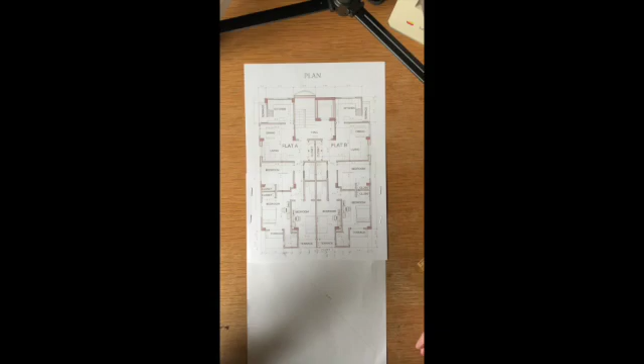But I have dimensions that are being put on there all over the place. So what I'm going to do is try and make a scale that will fit this particular drawing. I don't know what the scale is, so it'll be a bespoke scale. So I've taken a dimension which has been put on for me here, which is 25 foot 11 inches from there to there.

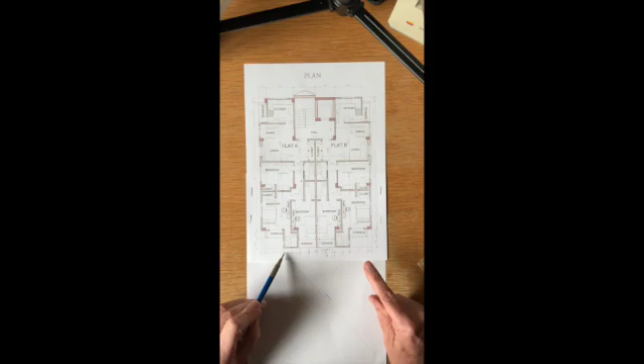So what I've got to do is to try and figure a way of doing this. Now, fortunately, there is a way that I can do this. So what I need to do is to draw a line from the beginning of the dimension down. Now, there is no angle that's required there. It just happens to be a line from there out that I can start to put a proper scale on. So I've marked off the beginning and the end of the dimension, and I've drawn my line down there.

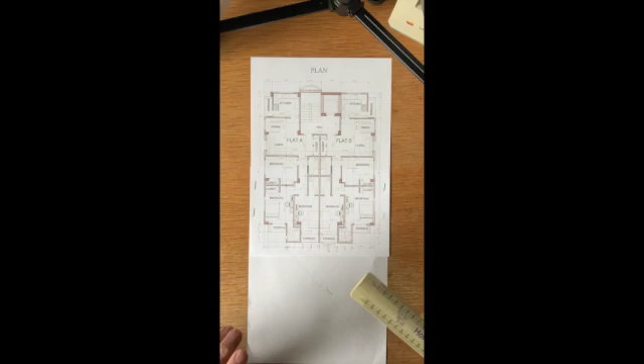So what I need to do then is to get my scale bar, which is this one here, and I'm choosing 1 to 100, and I've converted that 25 foot 11 inches to metric, because I want to draw in metric. So I've converted that across to 7 meters 899. So what I need to do is to mark off in true scale along that new line 7 meters 899. So I've done that and I've put it across there.

So I've also marked off all the meter bars all the way along that. So each of these little dimensions here, that one there, there, there, and there, are the meters. And that is the remainder of the 899, which is just slightly shorter than the meters that you can see here. So what else do I need to do?

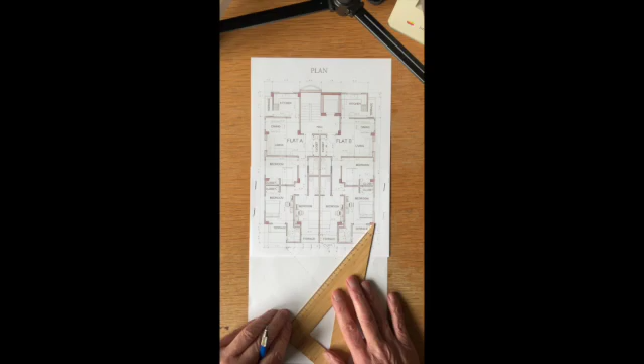Well, I need to try and put across a line from that point there to the end of the scale on the drawing. And I can do this in a number of ways, but the easiest way is to put my little tiny set square, which I bought from Tiger, little boxwood unit, and draw a line across there like that. Now what I need to do is to get my other set square, and I've got a big one that I can use for this. Let's put that over there and put this across here like this. And I'm going to use that as a slider.

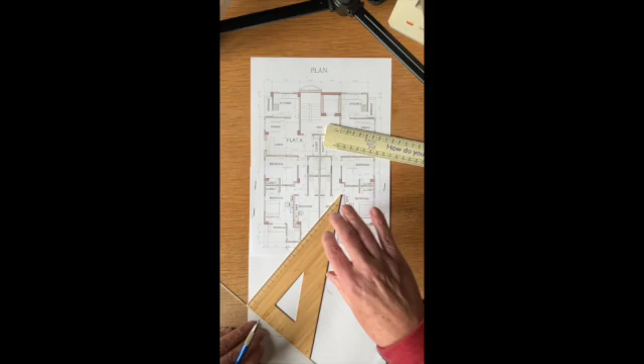Now, all I've got to do now is to slide that along to each one and mark on this scale that I've already done, just a little mark there, carefully then move it up to the next point and so on, all the way down to the end one there. Now that's pretty good. And I've marked the ½ meter there, and then I've put little tiny marks down there for all the millimeters. So I have, in effect, transferred a true scale onto whatever scale this drawing is, doesn't matter.

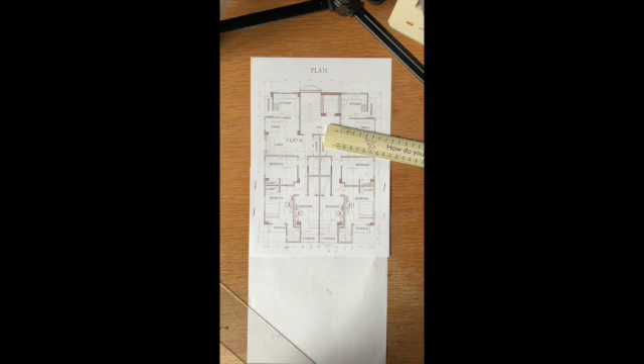So what I'm going to do now is try and put this onto a piece of paper. Now I've got a piece of paper here, and let's just mark that up and make it easier to use. So I've gone along here and marked on all the meter marks there for the particular scale, whatever this is, because using that diagonal there and shifting it all the way down there, it's made each one equal. So I've got a new scale.

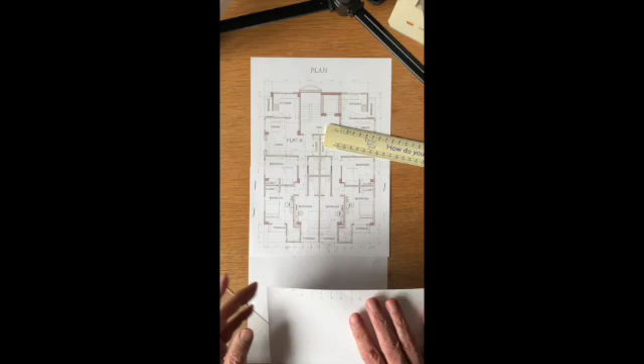So I put 0, 1, 2, 3, 4, 5, 6 up there. It's actually number 7 because whatever. And so I've also put on the little marks down here for the millimeters. In effect, I have now got a scale bar. So what I need to do is to check this, and I'll go up to here, and the 12 foot 5 is on there. If I put my new scale up there, that's about 3 meters 800, 3 meters 700 and something.

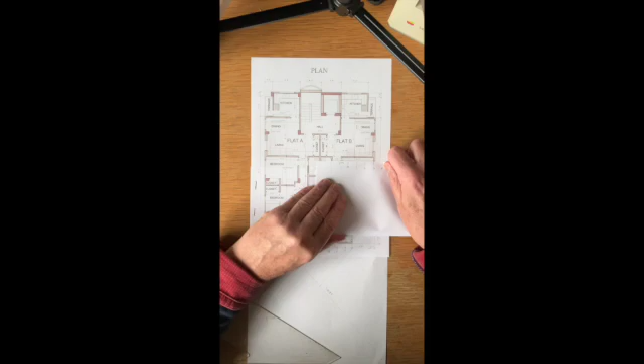If I convert 12 foot 5 to metric, that's about 3 meters 780 odd millimeters. So I'm pretty happy about that. 3 meters 800. Yeah, it's about right. So I've now created a scale bar that I don't know what the scale of the new scale is. It's just called Steve's best scale for this particular plan. But now I can put this on and I can check them.

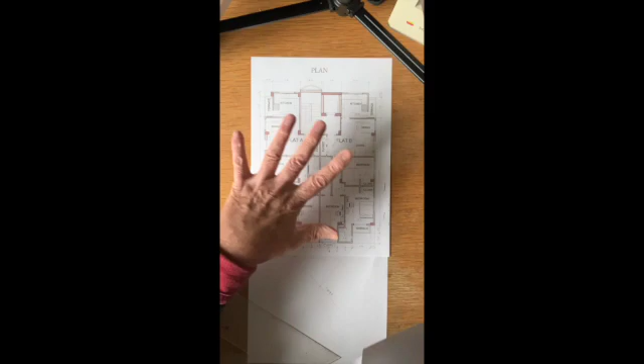Now, this drawing is absolutely brilliant because whoever drew this has put dimension lines all over it. Often as not, there may be one scale bar down the bottom that I have to use, or the rooms have been dimensioned under the title. So I've got to figure out which is which and try and make a scale bar from that. But it can be done.

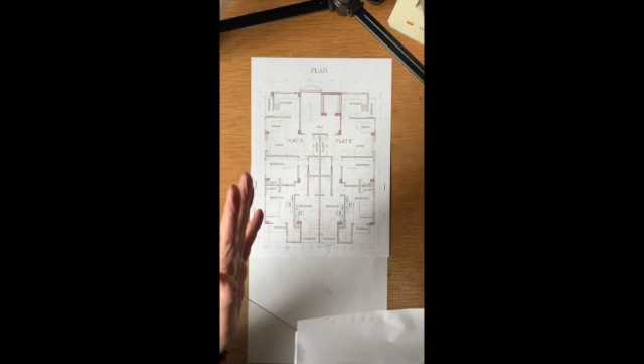So if you've got a drawing, you don't know what the scale of it is, it's been expanded and contracted by constant photographing or whatever, then this is a surefire way of trying to put together your own scale to fit that particular drawing. Don't try and use it on anything else. It will not work. It is very specific to this drawing because of what I've done there.